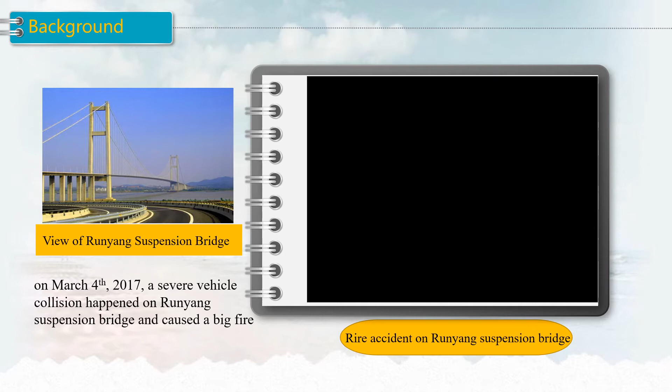After the accident, field inspection was carried out immediately. The vehicles involved in the accident were completely destroyed, and fortunately there was no casualty resulting from the event. Hangers were seriously damaged, and no broken wires were observed.

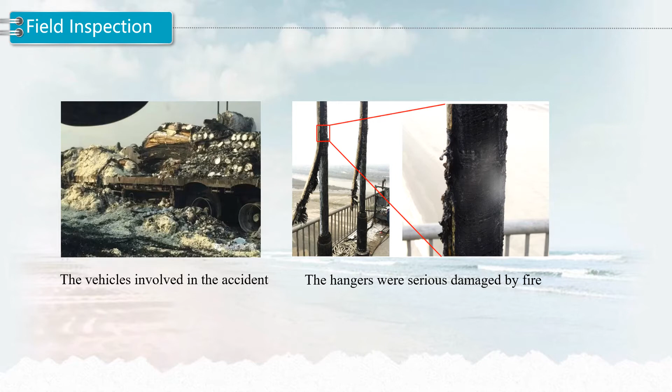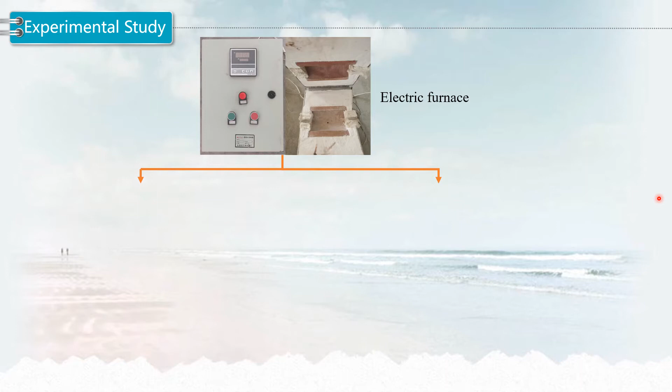Previous studies have revealed that high-strength steel loses strength and ductility after high temperature, and has inferior fire resistance due to its high thermal conductivity and low specific heat. As a result, fire can induce significant degradation of load-bearing capacity of hangers during a fire accident. Besides, hangers are also prone to fatigue damage, as they are subject to a large number of cyclic fluctuations induced by vehicles and the wind.

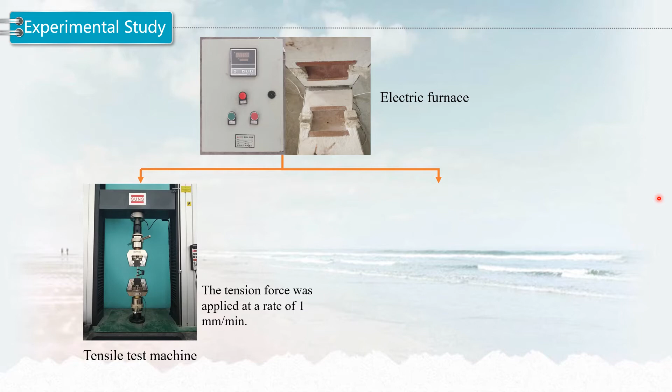To study the mechanical properties of steel wire after fire, an experimental program was designed. It mainly contains 2 steps. First, heat the specimens to the desired temperature by an electrical furnace and subsequently remove them from the furnace and cool down to room temperature. Second, conduct tensile tests and fatigue tests on specimens. All specimens in this test were identical to the one used in the suspension bridge.

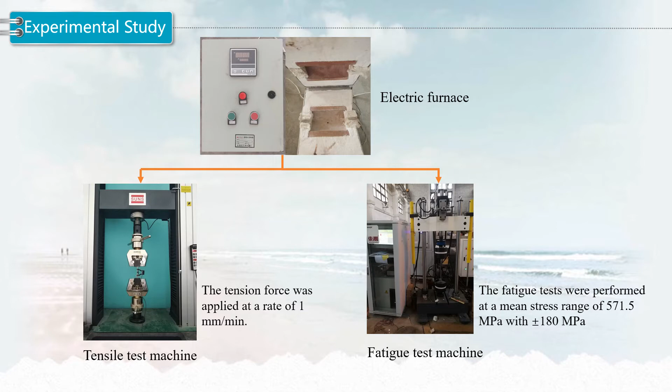To study the effect of heating temperature on the properties of steel wire, the specimens were heated to different temperatures ranging from 100 degrees centigrade to 800 degrees centigrade, and 2 cooling methods, air cooling and water cooling, were investigated and compared. The air cooling method is to simulate the natural extinguishing of fire, and the water cooling method is to simulate the fire being put out by a fire hose.

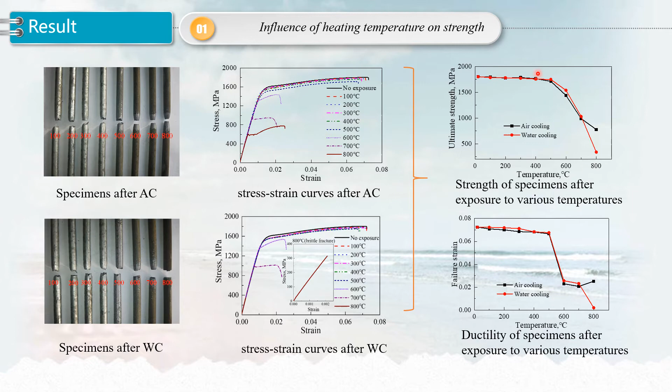Comparing the two kinds of cooling method, nearly no apparent difference was observed below 700 degrees centigrade. When the heating temperature reached 800 degrees centigrade, there was nearly no strain in the water cooling specimen at failure, and the specimen failed in a pure brittle manner.

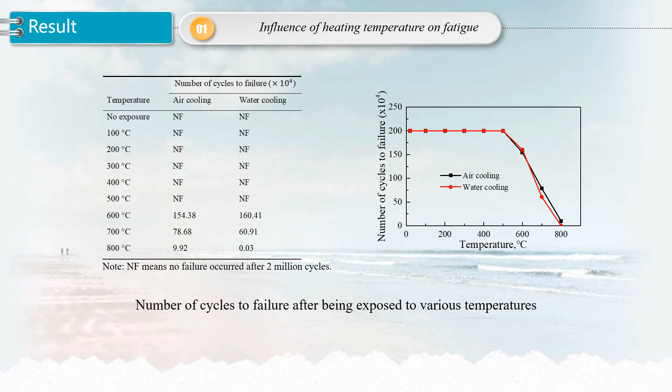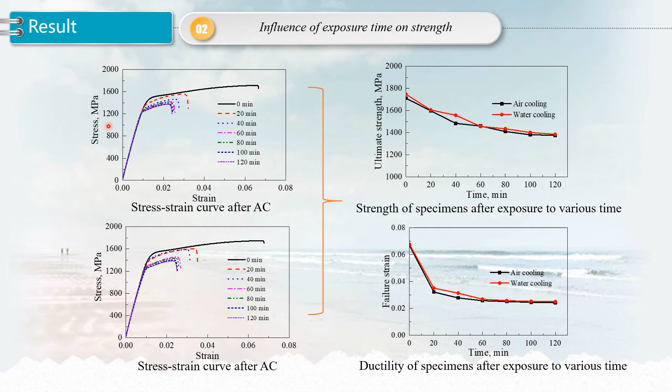Since the fire accident lasted more than an hour, in order to investigate the influence of heating duration on the mechanical properties of steel wire, tests were conducted on steel wire heated to 500 degrees centigrade with different exposure times. It is seen that strength and ductility decreased with increasing exposure time, and specimens exhibit more loss in ductility than strength in the heating process.

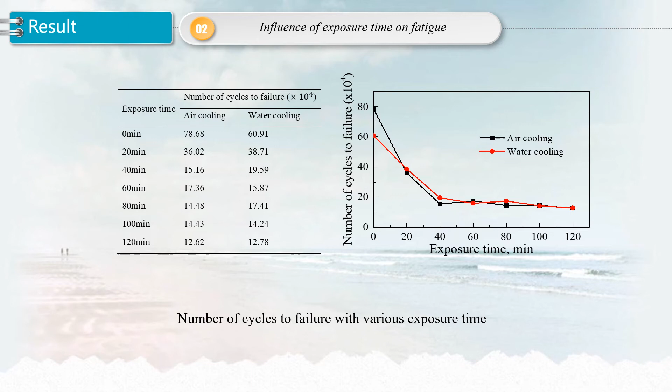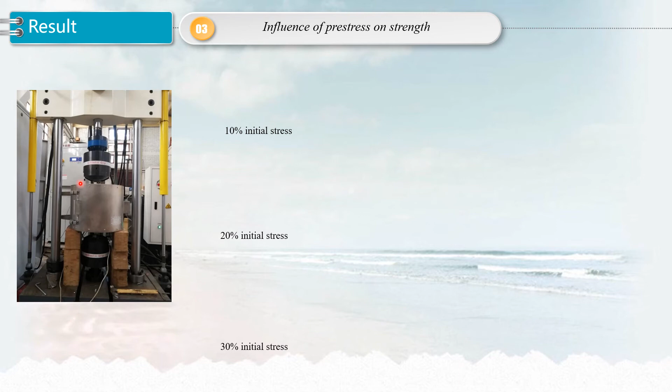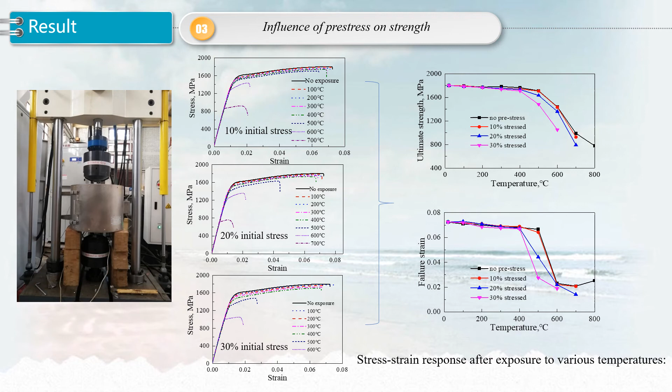The variation of strength under 10% pre-stress was nearly the same as the one without pre-stress. It dropped slightly for specimens under 20% pre-stress when the temperature was above 400 degrees centigrade. A remarkable strength reduction was found when the stress increased to 30%; the variation would directly follow the same trend.

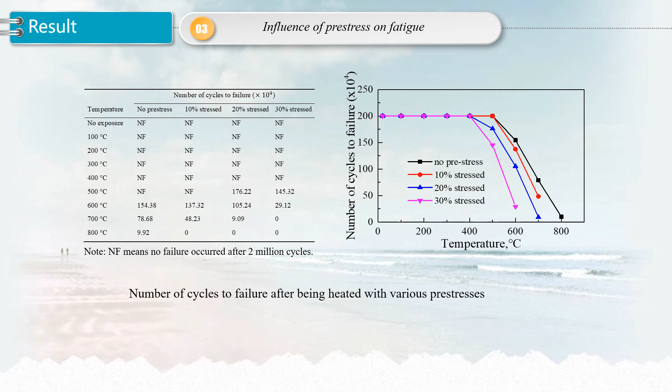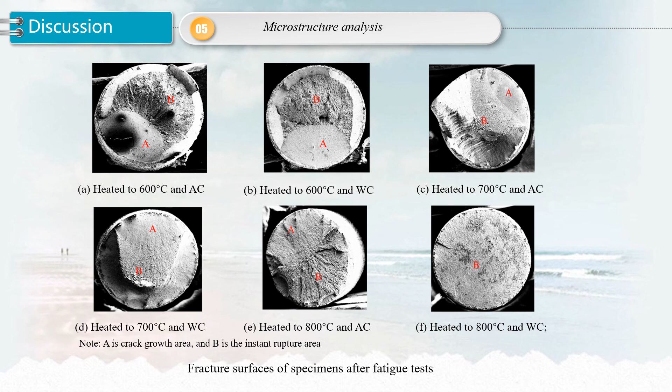The second is the instant rupture area as shown in picture B, where the specimen fails instantly; it is somewhat rough with some radiating fibers and shear lips. Moreover, metallographic analysis was conducted. It is seen that the microstructure gradually changes during the heating and cooling process. This is the root cause of mechanical property changes.